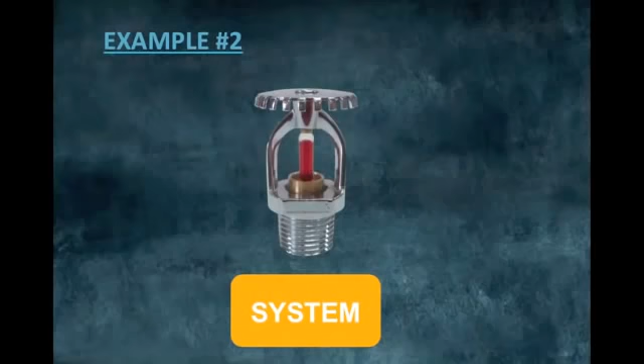to show this. A light bulb is a system whose input is a switch and whose output is light. A sprinkler is a system whose input is a faucet and whose output is water sprinkled over a large area. A dishwasher is a system whose input is a timer and whose output are clean dishes.

So if control engineering can be demonstrated through these simple examples, then what makes it so complicated that Wikipedia has a long article for it, and that engineers spend so much time studying it, even earning PhDs in control engineering? To answer that question, we need to dig deeper by defining two types of control systems: an open-loop system and a closed-loop system. An open-loop system is a system where the input does not depend on the output.

Take for example the dishwasher. If you set the timer to 1 minute, then the dishwasher will run for 1 minute regardless of what you place in it. If you place a whole cake there, the dishwasher will run for just 1 minute and you won't get a clean plate, just a soggy mess. Conversely, if you place clean plates in the dishwasher and run it, it will still run for 1 minute despite the fact that the plates are already clean.

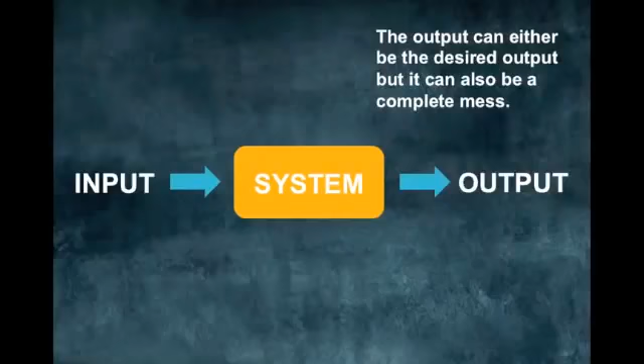I hope you can see the problem with open loop systems now. The output can either be the desired output, but it can also be a complete mess. Not to mention, open loop systems also have no control over how much resources they waste, just like the dishwasher running even if the plates are already clean.

The sprinkler system is another good example of an open loop system. If you turn on the sprinkler, it will sprinkle water all around its specified area, regardless if it's raining or not. Again, without the ability to relay information back to the input, open loop systems are prone to all sorts of situations where resources are wasted. For open loop systems to work optimally, a smart human being must always be there to check the output and adjust the input manually. Now, in contrast to the open loop system is the closed loop system.

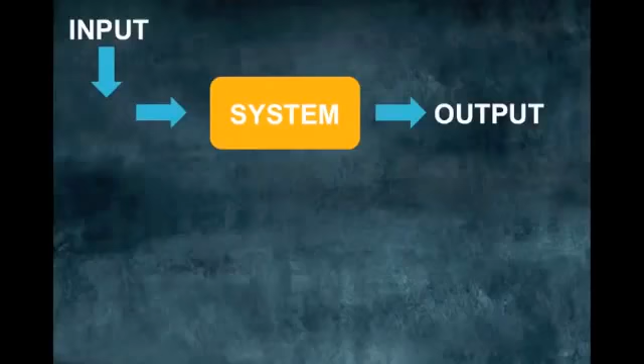Closed loop systems are a little bit more complex, and they operate by having their input dependent on their output. The diagram shown earlier can be modified to show you exactly how closed loop systems operate. The output is not just left alone. It's connected to a sensor which measures the output. The sensor is then connected to a controller.

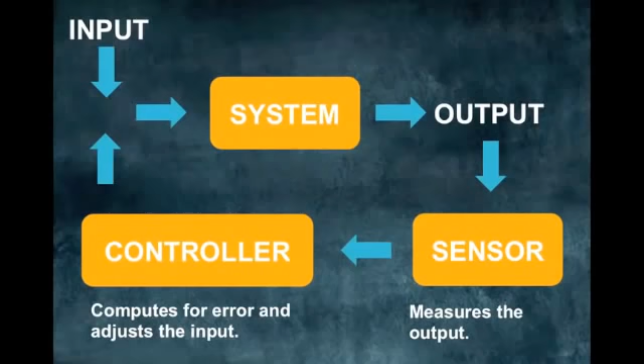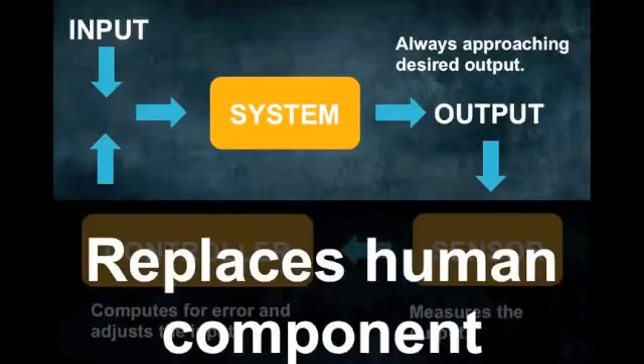The controller takes the actual output and compares it with the desired output. It computes for an error percentage and alters the input so that the actual output will always approach the desired output. These two parts, the sensor and controller, basically remove the human aspect of an optimized open-loop system and close the loop completely with no human interaction.

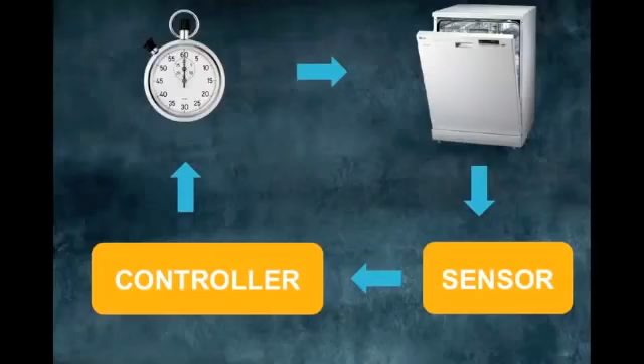Let's go back to the dishwasher and pretend that there's this sensor which measures cleanliness. Every time you turn on the dishwasher, the cleanliness sensor constantly relays information to the controller, which adjusts the timer accordingly. If the time was set too long, then the controller shortens it. If the time was initially set too short, then the controller extends it. With the sensor and controller set in place, closed-loop systems manage resources much better. They also present an actual output that's always going to be closer to the desired output over time.

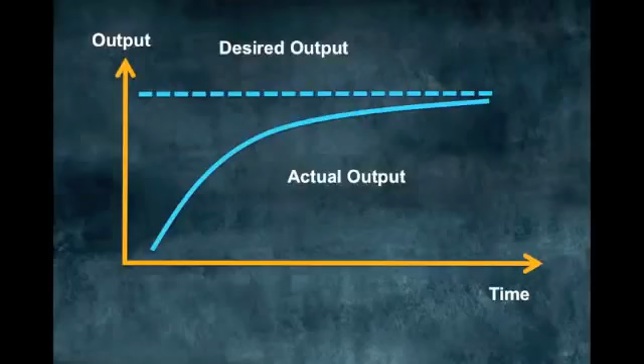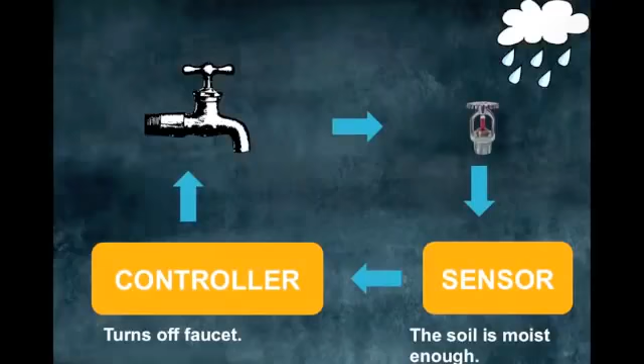The same thing can be said for a closed-loop sprinkler system. If a moisture sensor were set in the ground, that could serve as the basis for when the sprinkler system would run. If it was raining and the moisture level was high, then the sprinkler system could remain off. But if there was a drought and the moisture level was low, then the sprinkler system could automatically activate. Yes, automatically. If you still don't get the difference between the two, then this analogy might help.

Let's say you're a student in a classroom with a professor who's teaching you control engineering. He teaches the required lessons for the day and the class ends with absolutely no interaction at all. This goes on for the rest of the semester with no questions, no quizzes, no seat works, and no final exams. This might sound like a dream until you get a job and your first task is to create a control system for the company. This is exactly what an open loop system is.

The professor can teach you his best, but without any way of measuring, there's no telling what the output would be. You could learn everything about control engineering, but you could also be completely clueless about what your professor is teaching. Contrast that with a regular class, where questions, quizzes, seat works, and final exams exist. These things become the sensor in the system.

They help gauge the learning depth of the students, and with this data, the professor can compare the actual output with the desired output and alter his teaching methods to try to minimize that gap. This is the perfect example of a closed system where the actual output is always approaching the desired output. The reality is, closed-loop systems are much preferred over open-loop systems in almost every scenario.

But if I ask you to name 10 examples of real-world closed-loop systems, chances are you won't get very far. This is because closed-loop systems are much harder to create and thus they are more rare. But that doesn't mean that we should just sit down and do nothing. Creating more closed-loop systems will allow us to manage our resources much better. And in a world where lots and lots of commodities are being consumed at an insane rate, it's pretty important that we work towards a day where everything can be optimized. And that indeed is a day to look forward to.